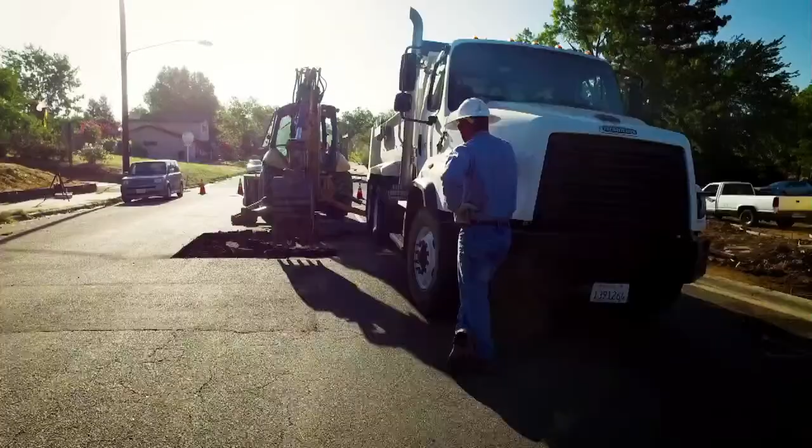Good evening. On behalf of the commissioners and staff, I would like to welcome you to the July 26th City of Roseville Public Utilities Commission meeting. This 7-member commission is responsible for studying, advising the City Council regarding all utilities owned or operated by the city, including electric, water, wastewater, and solid waste.

The Public Utilities Commission advises the City Council regarding planning, rates, public information, cable television franchises, and other matters relating to such enterprises, and may also hear citizen complaints as to operational rates. The Public Utilities Commission also advises the City Council regarding the activities of such joint power agencies as the city may be a member of, or which relate to such utility enterprises. At this time, I'd like to ask that everyone please put your electronic devices on silent.

Pam, could you please call the roll? Yes. Commissioner Bilski, absent. Commissioner DeLacy. Here. Commissioner DeMarkey. Here. Commissioner Granger. Here. Commissioner Knox. Commissioner Maish. Here. And Chair Webb. Present. Can we have the roll reflect that Commissioner Bielski is now in attendance?

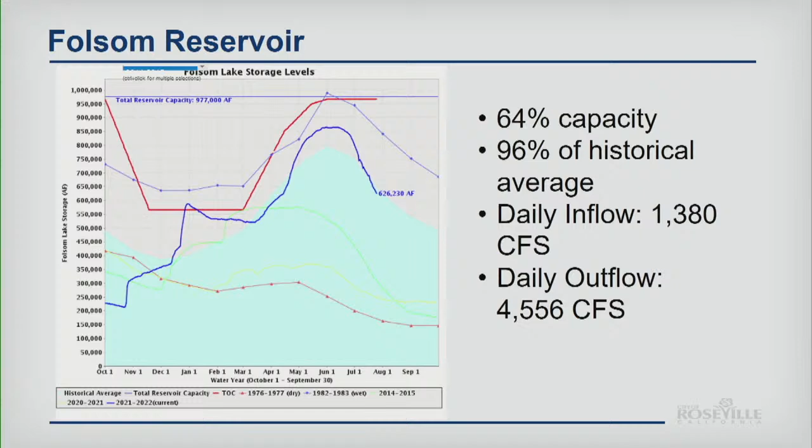So generally speaking, the reservoir is in relatively good shape, but one caveat, and you'll see this play out over several months, is where Folsom Reservoir sits relative to other reservoirs in the system, which we'll talk about. I also want to note the inflow at 1,380 cubic feet per second. Outflow right now is relatively high at 4,500 cubic feet per second, and I'll explain why. So we can go to the next slide, please.

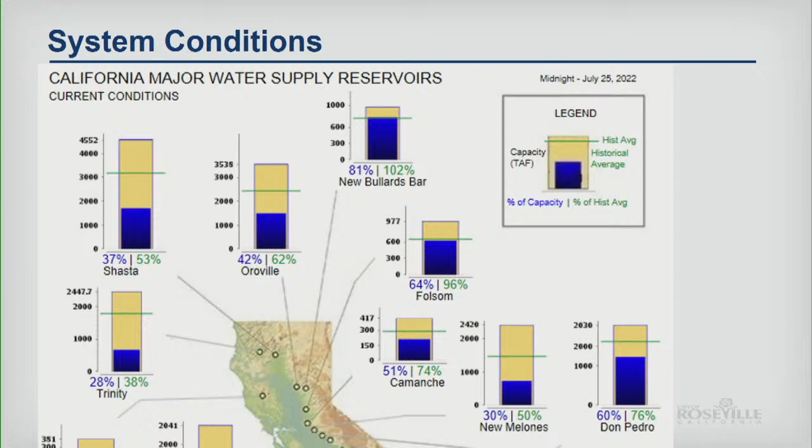So with that, that's my presentation on this particular item, and I just wanted to open that up for any questions you might have. Do any commissioners have any questions for staff at this time? I have one. Of course, Southern California is in terrible shape with water there, and they've relied on Lake Mead a lot, and it's pretty low right now, historically low.

Will there be any legal pressure on Folsom or other reservoirs in this area to supply even more water to Southern California, which will jeopardize our situation? Well, one of the things to keep in mind is the situation on the Colorado River has been years in the making. They've seen deterioration on that river with respect to just general hydrology results. And obviously, both Powell and Mead have been dropping over time.

That is certainly a consideration that the federal and state agencies are looking at very closely. Reclamation, I would say right now, is really keenly focused on that situation in the Colorado River. If we're talking about an integrated system, there could conceivably be pressure for Northern California reservoirs to assist. But the problem is that there's not a lot of room there to assist when you also have other pressures such as Bay Delta and some other aspects as well. But certainly, yes, that could be something that plays out over time.

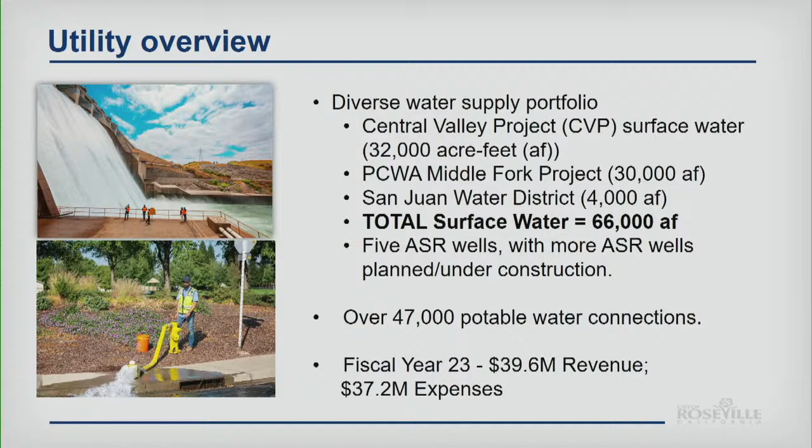In addition, we're focused on a diverse water supply. So we have 5 ASR wells in our system right now. We have more wells that are planned or under construction. We have 2 on the west side of town that are very close to completion. So those are looking to be probably completed by the end of this year. And again, those are in West Roseville. And then we're already starting to look at the next 2 wells where we already have locations and monitoring well facilities located. So we're looking to add 6 additional ASR wells over time. The system has 47,000 potable water connections. Roughly from a revenue standpoint, we're about $39.6 million. Expenses about $37.2 million. So next slide, please.

So organizationally, we're basically set up in 6 different sections. So the water utility is part of the Environmental Utilities Department. We're a division within that department. And there's really 6 key sections within the utility. First is our Barton Road Water Treatment Plant, which is located in Granite Bay. That's our sole water treatment plant that treats water and delivers it to the city of Roseville. And several of the commissioners here have actually been on a tour of the facility, so you've seen it live.

The next section is our water distribution group. That's our largest group. Essentially, these are the folks that maintain a lot of our infrastructure with respect to pipes and grounds, ASR wells, pump stations, tanks, you name it, they're there. They're maintaining it and operating those systems, repairing those systems. They also are engaged in rehabilitation.

We have the small but mighty government relations section. That's Noel Maddock as one of our sections. And obviously, we're very engaged in terms of making sure we're protecting Roseville's interests, both in the legislative and regulatory realms. And this function actually serves the entire department. So Noel covers not only water, but also wastewater, solid waste, and other related issues that are important to environmental utilities in the city.

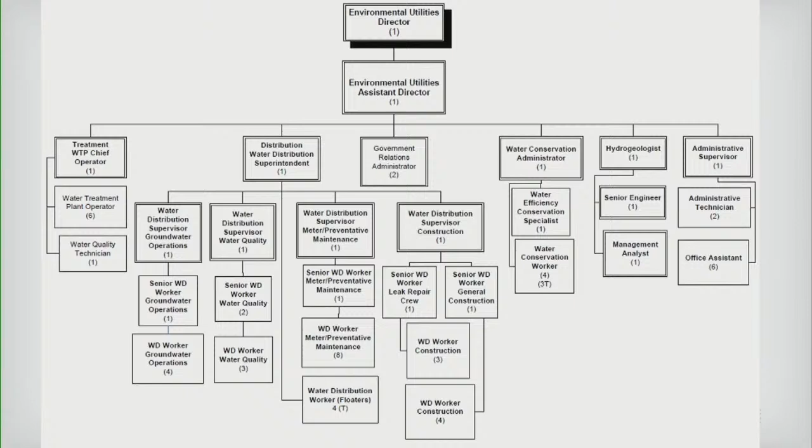We have a small engineering hydrogeology group, which focuses in on water planning, engineering projects, as well as a hydrogeology function. Because we have an ASR program that's fairly robust and growing, we do have a staff hydrogeologist that actually helps to maintain that program and advance that program over time. And finally, we have a customer service group that works with our customers to meet the service needs that are out there.

More just on infrastructure, we have a 100 million gallon per day water treatment plant. We maintain 688 miles of water main, 5,334 hydrants in our system. We have 8 water tanks that equal about 48 million gallons of water storage. We manage, again, our active groundwater well program. Again, we talked about our 5 ASR wells, and right now the current well capacity is about 14.6 million gallons per day. For perspective in our system, typical summer demand, right now we're kind of hitting the peak. We're about 50 MGD typically, but that does vary. And it does also vary based on conservation requirements relative to irrigation, just to let you guys know. And then typical water demand hovers around 12 MGD in the system.

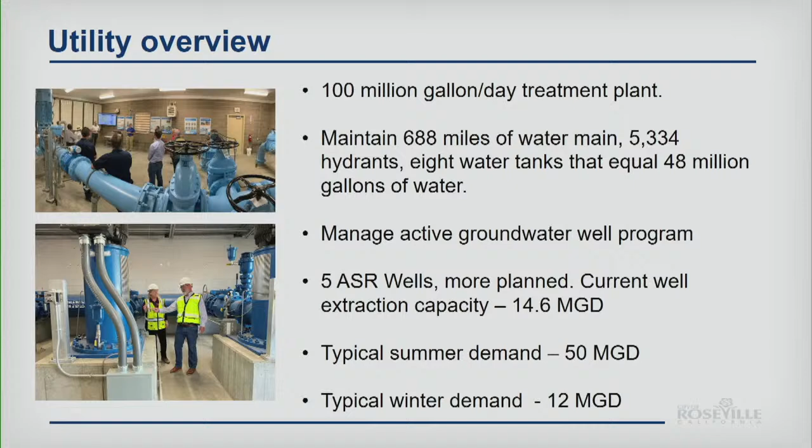All right, so switching to strategy and priorities. And so I provided today for each of the commissioners, we have our strategic plan. And so I want to talk a little bit about why this strategic plan is important and probably somewhat unique.

So in 2021, our water leadership team, with input from our staff, developed a 4-year strategic plan that reaffirmed our mission, vision, and core values, as well as establishing 5 key goals, 15 related strategies, and 76 tactics to help focus and guide activities within the utility. So the 5 goals that are embedded in the strategic plan are water resource adequacy, infrastructure stability, customer satisfaction, investing in our team, and community and partner engagement.

So what are the commitments that I personally made in terms of developing a strategic plan? And I've seen this over my career, is strategic plans that get created and then they get promptly put on a shelf and collect dust. And as a manager and as a leader in the organization, I kind of simply refused to do that. I wasn't going to repeat what I saw in the past. And so my personal commitment is actually to take the strategic plan and put it into action and create it as a tool, basically, to ensure accountability for our ratepayers ultimately.

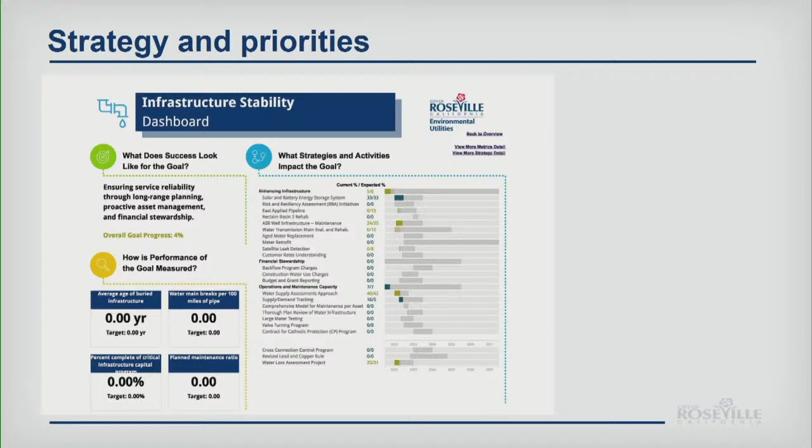So next, we'll move on to projects, programs, and initiatives. So again, I just want to go through some of the key projects. And this is by no means exhaustive, so this will be just a quick overview. So on the books for nearly 20 years, we had the West Side Tank and Pump Station project. The construction of this project began in 2021. It consists of two 6 million gallon tanks and a pump station. And these facilities are now completed and are operational as of last month. And the contractor is wrapping up some final work like grading and paving of the site.

The final part of the project is construction of a 3,000 square foot combined field office and shop. Design of that facility is nearly complete, and we anticipate the building will be constructed and in operation by next summer. At that point, we will do a grand opening of that facility, and you all will be receiving an invitation when we do that grand opening.

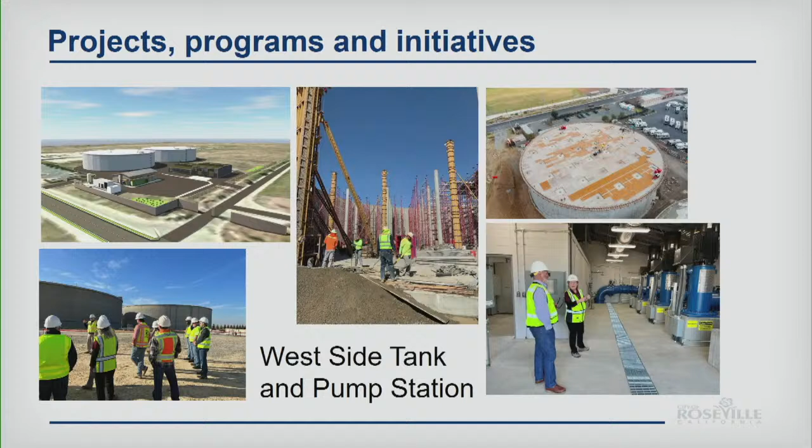Next is a series of projects, our aquifer storage and recovery wells. So we're continuing to advance our aquifer storage and recovery program, and that includes active capital projects to add more ASR wells into our system. So again, as I mentioned before, late this year, we anticipate that 2 new ASR wells in West Roseville will come online. We are also beginning design on the next 2 ASR wells, which will be located in the Misty Wood and Campus Oaks areas. We anticipate those wells to be completed in late 2024, early 2025.

From there, we have 2 more ASR wells that we are planning, one in East Roseville near Marlin Drive, and the other off of Pleasant Grove Boulevard, with likely completion around 2027. The ASR program continues to be a key element of the long-term diversification of Roseville's water supply.

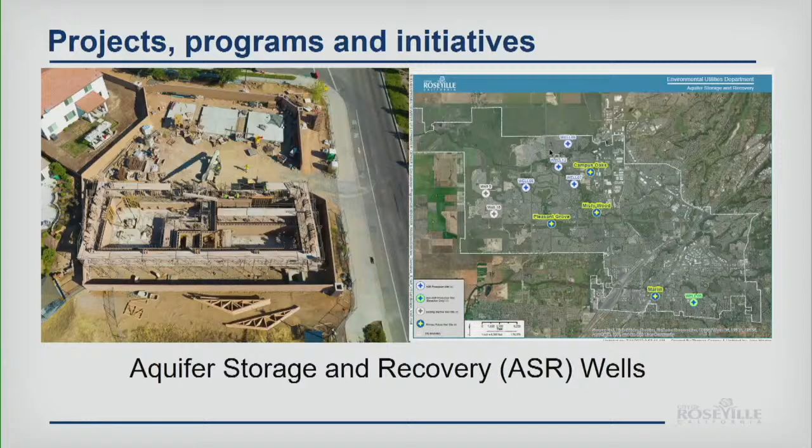Another key initiative that we've undertaken in the water utility is focused on rehabilitation of water infrastructure in Roseville's older core neighborhoods. Timed before road resurfacing by the Public Works Department, we take the opportunity to rehabilitate water mains, replace older wharf hydrants, and make service line improvements on our side of the system.

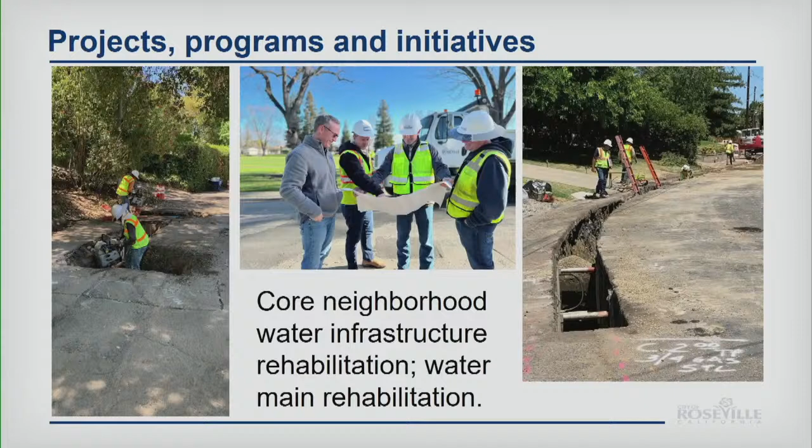We finished such work in the Hillcrest neighborhood earlier this year and are beginning design for a similar rehabilitation effort in the Roseville Heights neighborhood this year, with construction in that neighborhood scheduled for 2024. After that, we will move on to another core neighborhood, which we're currently determining for likely work in the 2026 timeframe.

On a larger scale, we're working with our regional partners to find alternative access to currently available water supplies to develop redundancy and reduce risk related to bringing our surface water supplies through a single intake at Folsom Reservoir. So working with the City of Folsom and San Juan Water District, we are undergoing a technical study looking at improvements at or near Folsom Dam that would create redundant intake structures that would reduce the risk of a potential dead pool scenario if that were to happen.

At the conclusion of the study, working with the Bureau of Reclamation, we will evaluate next steps, and if a specific project becomes apparent and feasible, we would then advocate for those improvements to be made. The next set of projects is actually working in partnership with the Placer County Water Agency. On the more immediate term, we're working on joint improvements on the treated water side of PCWA's system that include intertie improvements, increasing delivery capacity within PCWA's system, and other improvements that are mutually beneficial to both Roseville and PCWA.

On a much longer-term basis, we're developing a 3-phase raw water pipeline project that would effectively connect our PCWA Middle Fork project supplies upstream of Folsom Reservoir with a connection to Roseville's Barton Road Water Treatment Plant. The project will likely be a joint project with the U.S. Army Corps of Engineers, Roseville, and PCWA, with an initial $75,000 federal appropriation to pay for U.S. Army Corps of Engineers staff time.

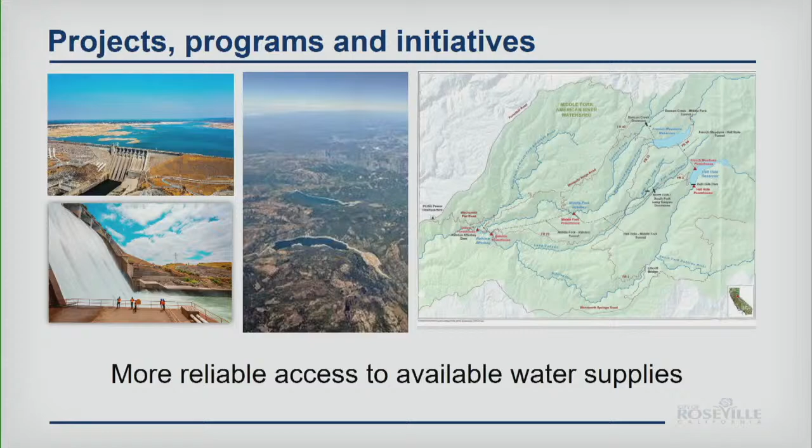So we have many more projects, programs, and initiatives in the water utility. Briefly, active rehabilitation of vertical infrastructure assets such as our Barton Road Water Treatment Plant. We're also doing active rehabilitation every 6 years on our ASR wells. In fact, we just finished up rehabilitation on our ASR wells to prepare for next year. And we're completing that, again, just to prepare for another potential year of drought.

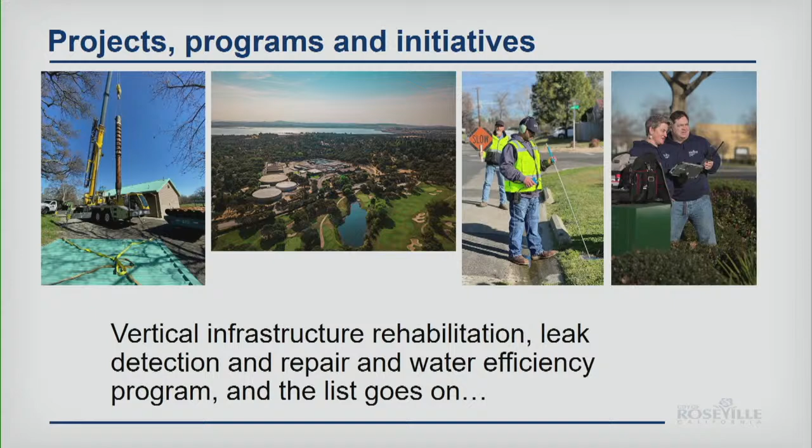We also have an active leak detection program that uses simple sounding tools, but we're also now leveraging technology such as cellular sounding equipment, as well as satellite flyover scans, to proactively detect system leaks and more efficiently dispatch repair crews. Finally, the water utility has a robust water efficiency program that focuses on water efficiency programs and rebates for our customers, water waste patrols and enforcement, water efficient landscape ordinance plan checks and verification, and other demand management efforts.

The last part of the presentation, I want to focus on people. In my view, the most important aspect of the operation are the people that keep all of this running. I am humbled by the professionalism, dedication, and pride that the water utility staff have in serving the community of Roseville. We are guided in the division by 5 core values: teamwork, competence, respect, leadership, and integrity.

It's not just something we hang on a wall. We actively work to incorporate these core values in how we do our work. Many focused discussions and team building activities happen around how we can live our core values every day. At the end of the day, myself and the water leadership team work very hard to maintain a focused culture driven by these core values.

And in my view, better performance, essentially adherence to these core values could equal better performance and superior customer service experience by focusing in on these areas. So I think it comes down just simply to this, that focused and happy employees translate into much higher levels of sustained customer service satisfaction in my view. So with that, this concludes my presentation, and I'd be happy to answer any questions you may have.

Thank you. Do the commissioners have questions for our staff right now? Yes. Where can residents find a list of the current rebates that the city offers? So we've got actually a pretty robust water efficiency page. I think it's www.roseville.ca.us/savewater. Mm-hmm. And that'll take you right there. And then there's also the navigation. If you do click on water efficiency, it'll take you to that page and has everything kind of laid out in one page. It was well done. Yes.

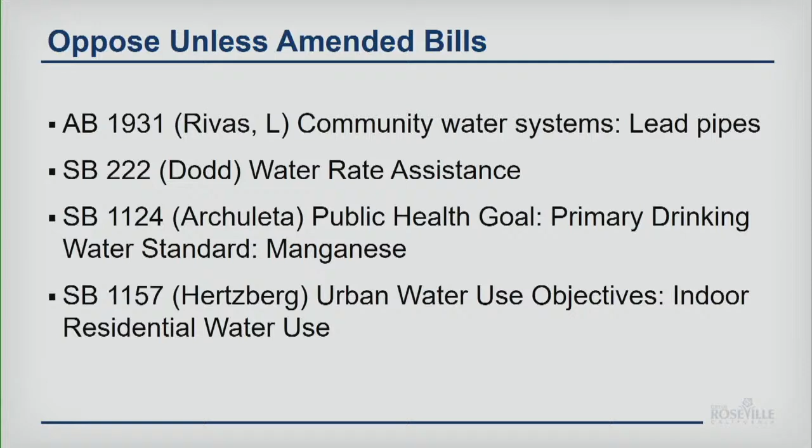So I'll talk about something that's a little bit better from our perspective, which is the Low-Income Household Water Assistance Program. Roseville is excited that we have been able to participate in this program. Back in October, I provided the commission a briefing on this new temporary program that was created to provide income-eligible customers relief from past due water and wastewater bills. As a reminder, income-eligible customers will be able to receive up to $2,000 to pay down any past due and current bills. There was another program that was just during the COVID time period. This one extends beyond that.

Our utility department has already enrolled in the program, and staff has worked with Project Go, which will be the implementer of this program. And we have provided information to our customers. It went out in one of our recent newsletters to make them aware that they have this ability to participate should they need. So that one was pretty exciting.

The last regulatory item is an update on the establishment of a maximum contaminant level, MCL, for hexavalent chromium, Chrome 6. In late March, the State Water Resources Control Board's Division of Drinking Water posted a new administrative draft for an MCL for Chrome 6. The original MCL was set at 10 micrograms per liter, which was later overturned by the Sacramento Superior Court in 2017. The court did not make a determination on whether the MCL was economically feasible. What they merely found was that the department did not adequately document why the MCL was economically feasible.